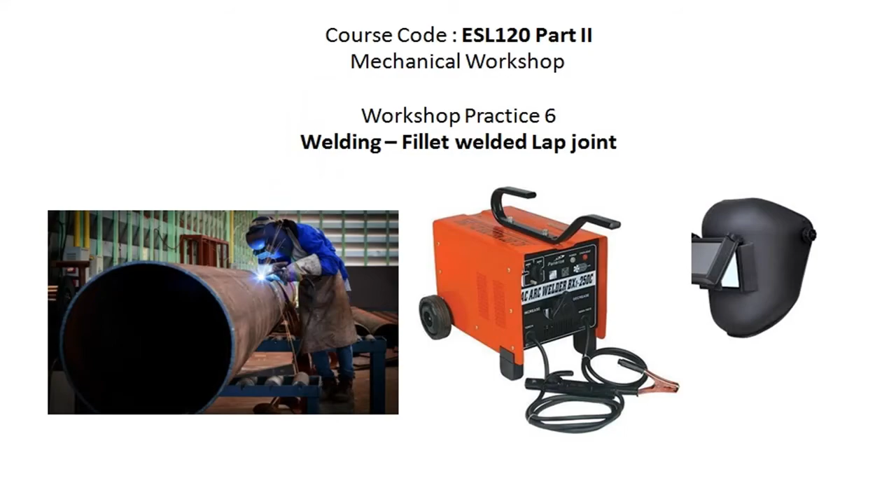Dear students, today we will discuss about welding. Welding is used to make a permanent joint on metal or non-metal, non-metal like plastic, glass, etc. In our mechanical workshop, we use only welding of metals.

There are so many types of welding. Mainly, there are basically two types: pressure type welding and non-pressure type welding. In pressure type welding, one example is forge welding. In forge welding, metal pieces are heated to a high temperature, just below the melting temperature, and kept together, then struck with a hammer. Then both will be stuck together. That is one type of pressure type welding.

Second one is resistance welding. For example, spot welding. Keep the items one over the other and give electric current, meaning heavy current. Then press the electrodes together. Then the item will be melted at that spot and stick together. That is the pressure type welding.

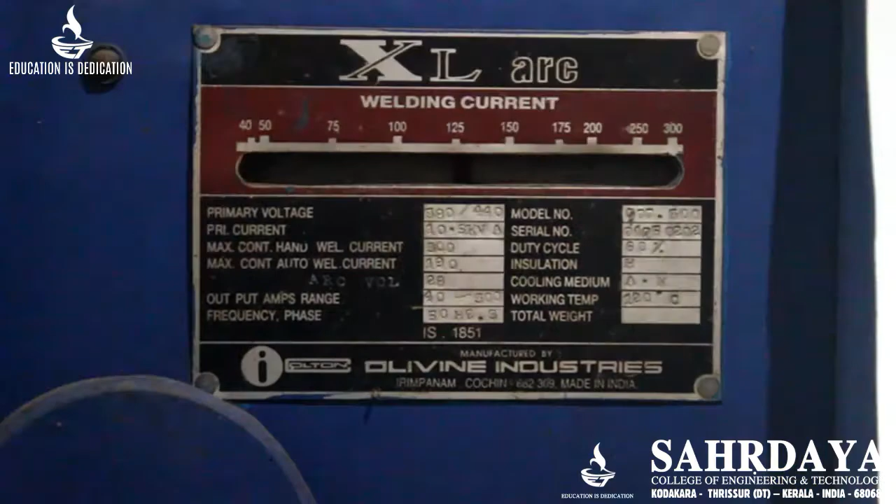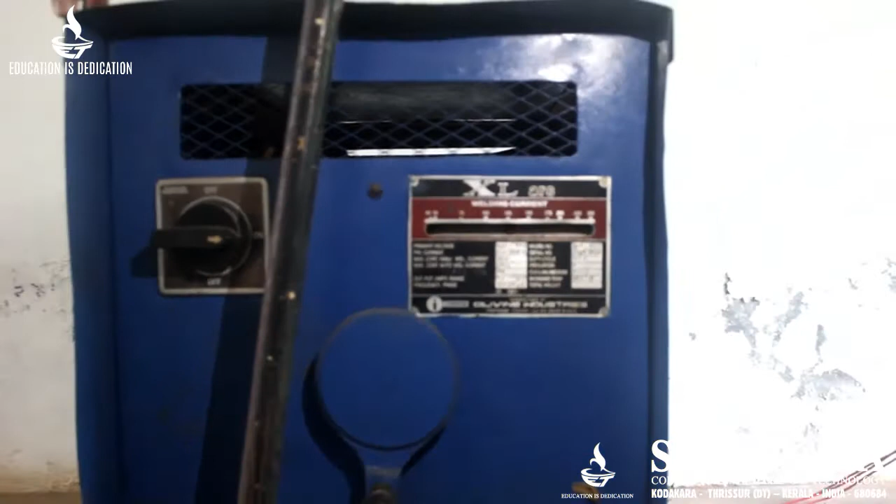See, you can see the label of a welding machine. This is a 3-phase welding machine. The input is 415 volt 3-phase, and output, the open circuit voltage, will usually be around 50-52 volts.

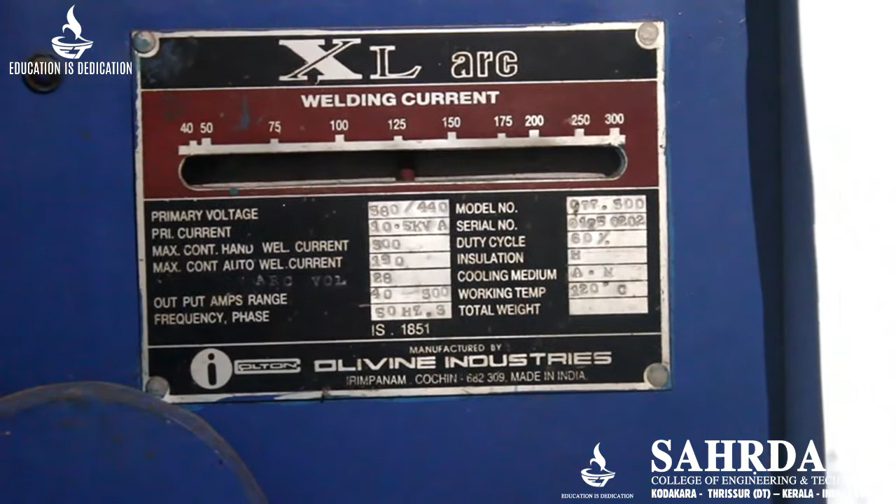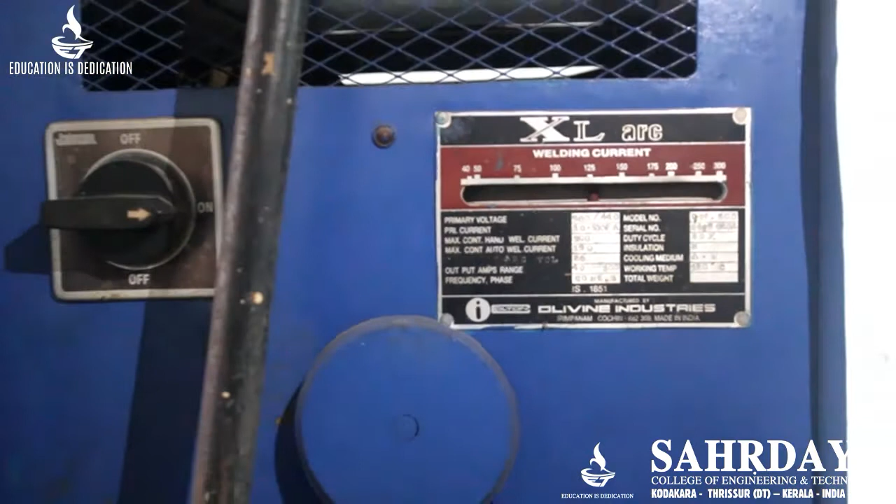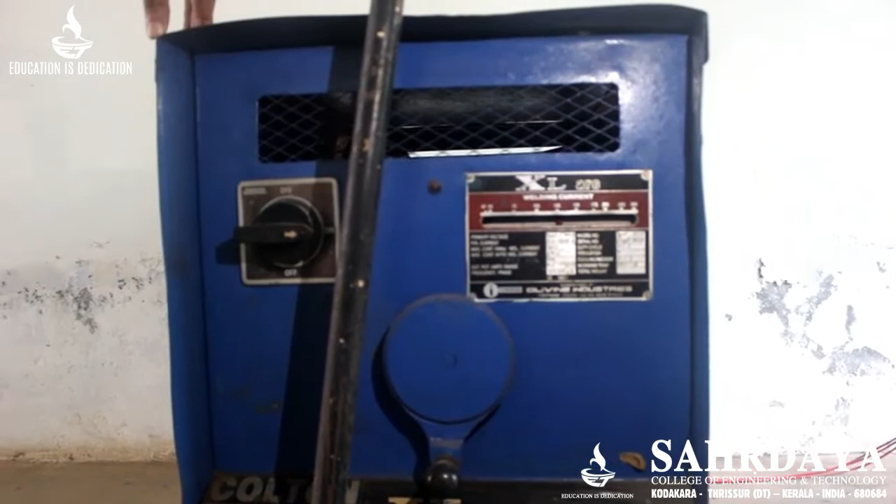Whenever you are starting the welding, the voltage will come down to about 20-22 volts. Actually, the 50 volt is kept because if you hold both the terminals with your hand, there should not be any shock. You can go up to around 90 volts without shock. But in rainy season it may be a little shocking if you are holding both terminals. In summer season, no problem at all. 50 volt, almost all persons can withstand that voltage.

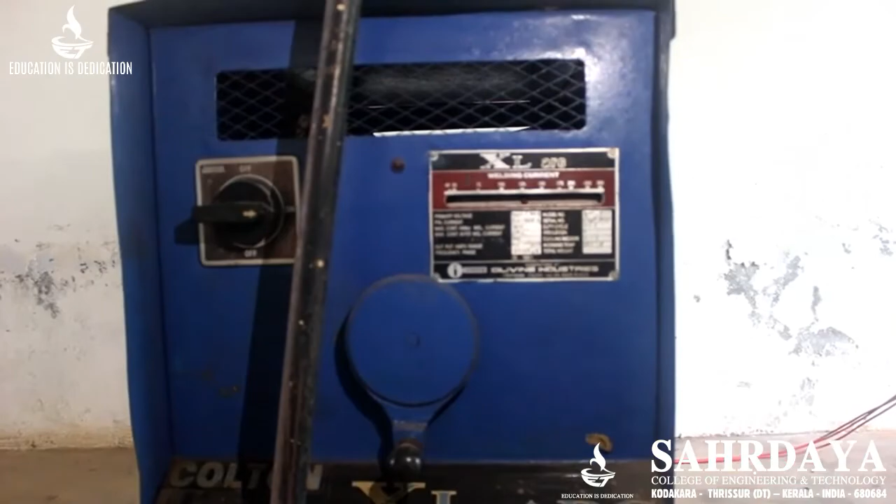In order to adjust the current, we have to rotate this one. Current adjustment is required depending upon the diameter of the welding electrode we are using. For smaller welding electrodes, less current is required, and for larger diameter electrodes, more current is required. You have to look into the chart to see how much ampere is required for a welding electrode.

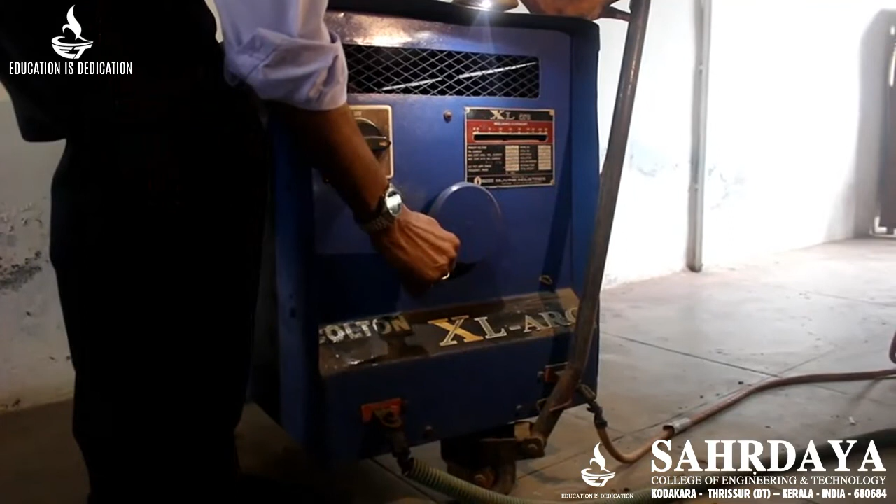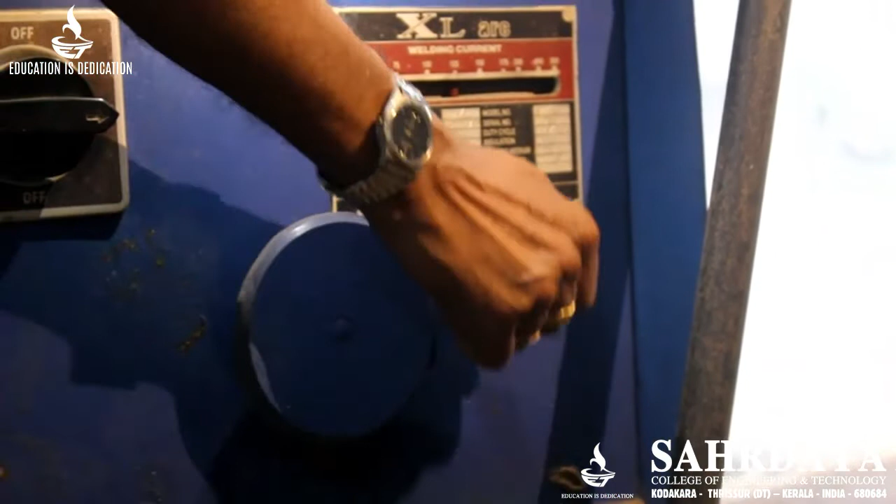Usually it will be written on the electrode cover itself. Whenever we rotate in the clockwise direction, the current will increase, and if you want to reduce the current, you rotate the handle in the anti-clockwise direction. We are here using a 3 mm electrode. For a 3 mm electrode, the required current is about 90 to 110 ampere. That all again depends upon the base material and thickness of the base material we are using.

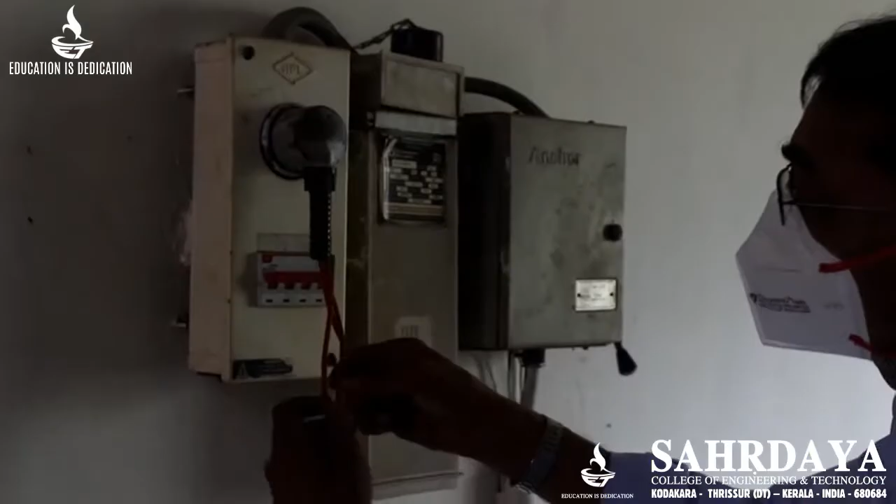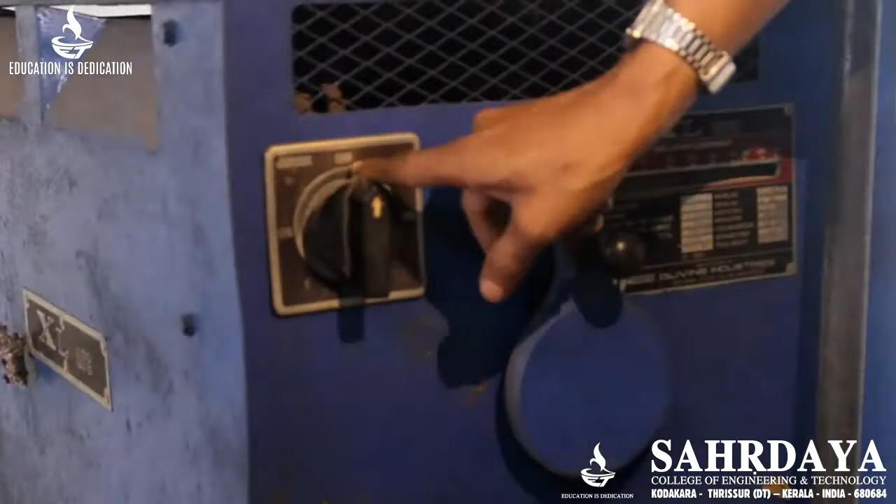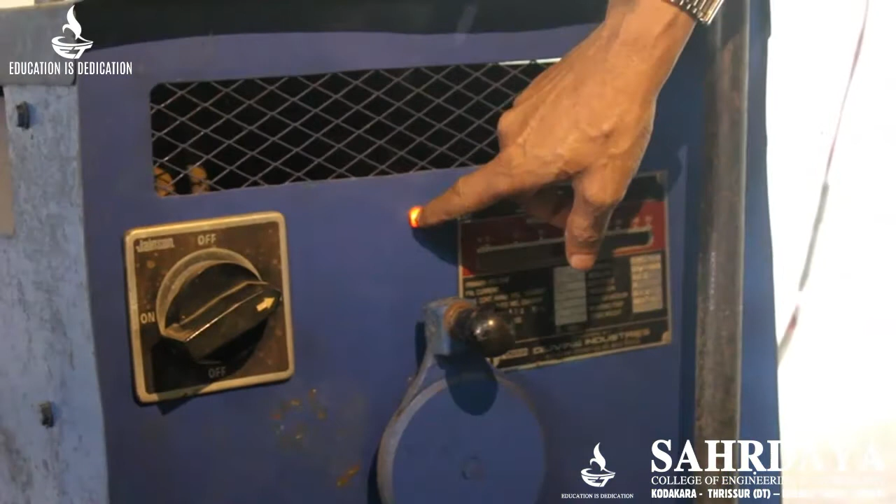The input is a 3-phase 3-wire system. You can see this one, and a main switch is provided here to switch on. After switching on, you can see the wire going inside the welding set. Here there is another switch for switching on or off, you can see off and here on. This also on, either rotate in the clockwise direction or anti-clockwise. Now you can see here the light is on, that means the welding set is now ready for welding.

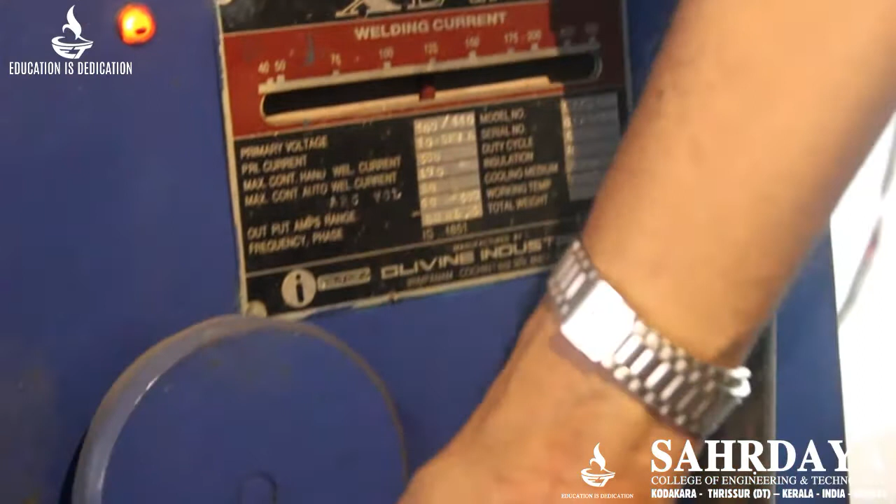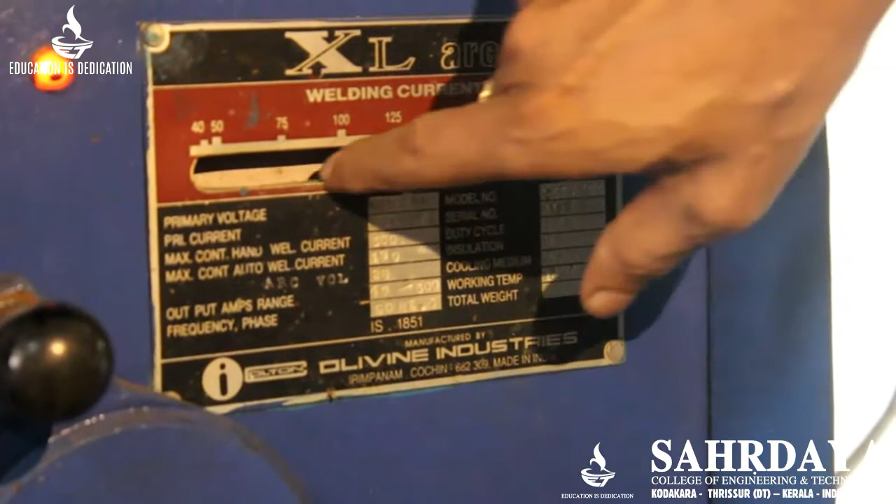Again, it depends upon the diameter of the welding rod we are using; we have to adjust the current. To increase the current, you have to rotate this handle. You can see a needle which is moving according to the rotation of this one. You can see here, now it is in between 125 and 150 ampere, about 130 I think.

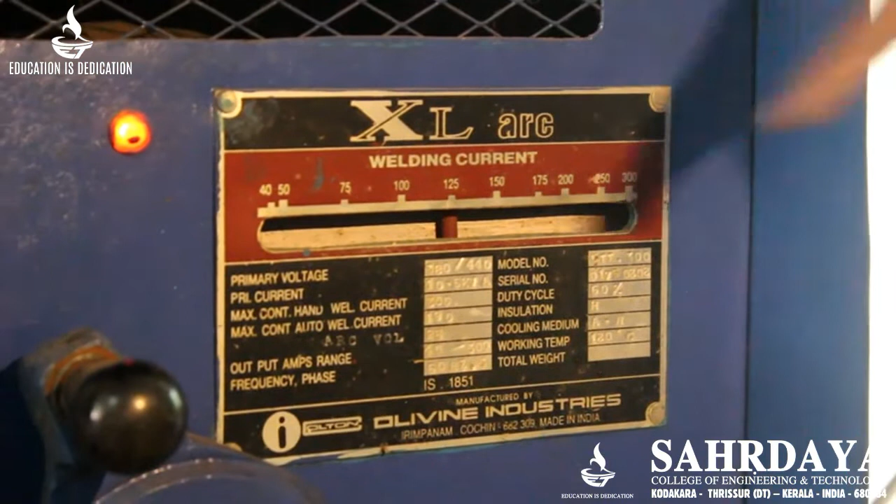130 ampere rating is used. In order to use 10 gauge or 3mm welding rod, we have to reduce the current to about 125 ampere. Again reduce up to 110 ampere, that is enough.

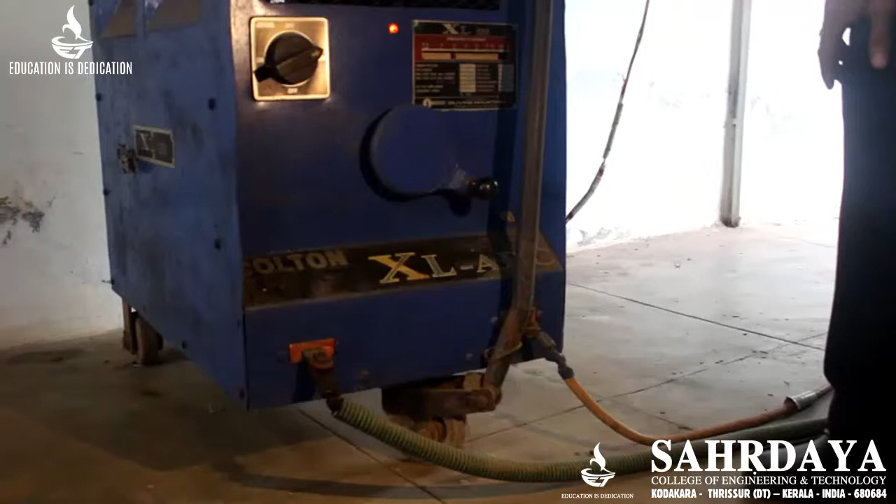Output is taken through two terminals. One is for the electrode and the other is the earth cable.

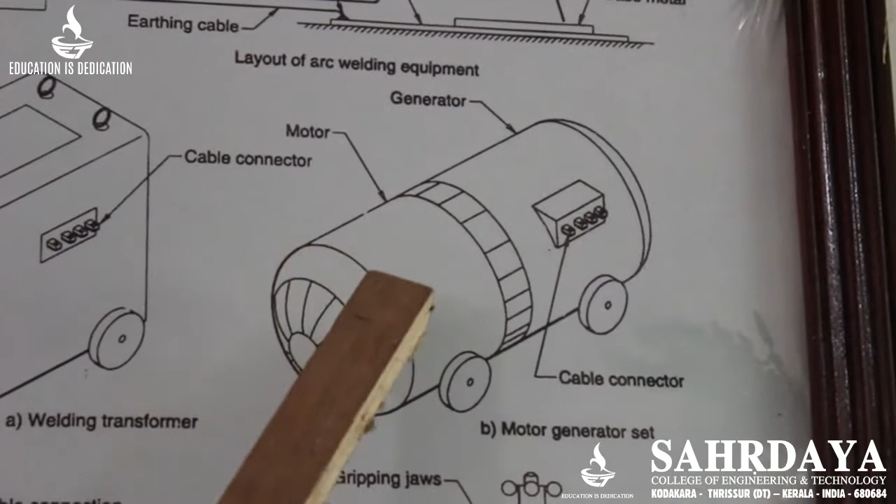When there is no electric power available, we have to use a motor generating set. Here you can see this motor generating set. One generator will be coupled to a diesel engine. The diesel engine will be working and coupled to the generator, and the generator current is taken for welding. That is this one.

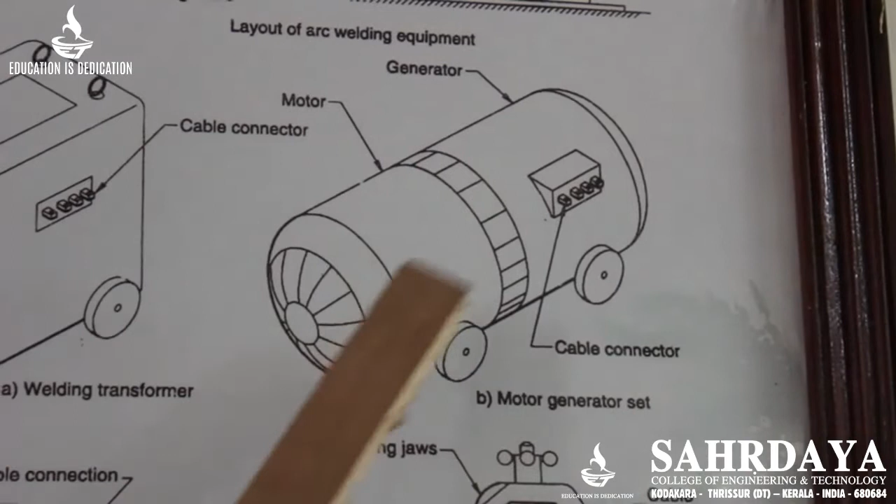Similar to this one, the DC welding set is also available. Its size will always be very small and the weight is also very small. For portable purpose, usually nowadays the DC welding set is used.

Now I will tell about various types of accessories used in the welding shop. This is the face shield. Face shield is used to protect your face and the skin of the face from the ultraviolet rays emitting from the welding region.

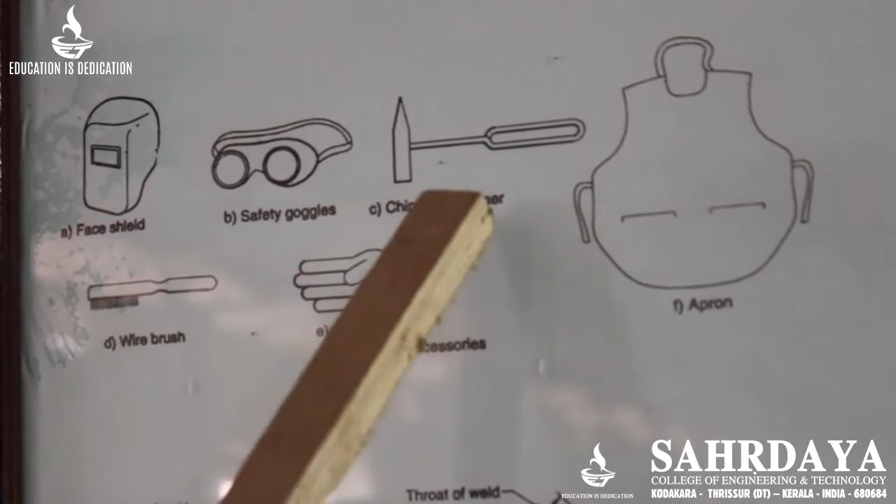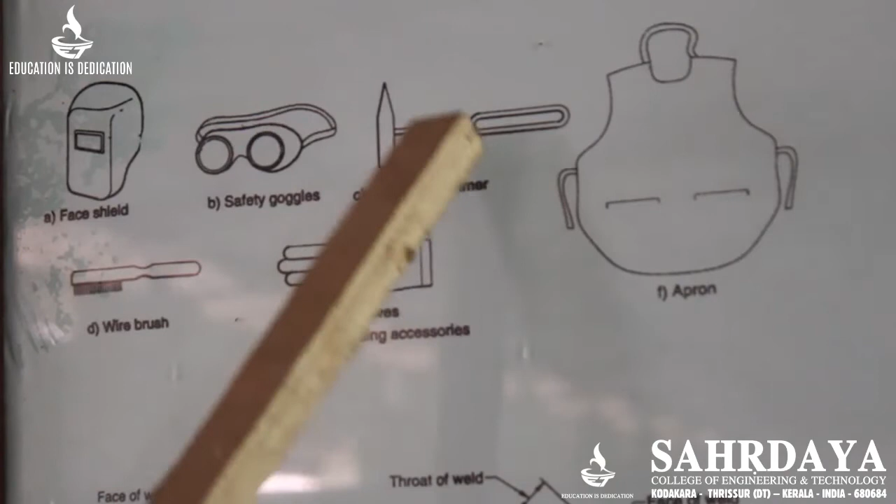Similarly, safety goggles are usually used. Whenever the flux has to be removed after welding, safety goggles are used along with a chipping hammer. We have to chip the item to remove the unwanted flux, etc. For that you have to use a chipping hammer. This I will show you physically here also.

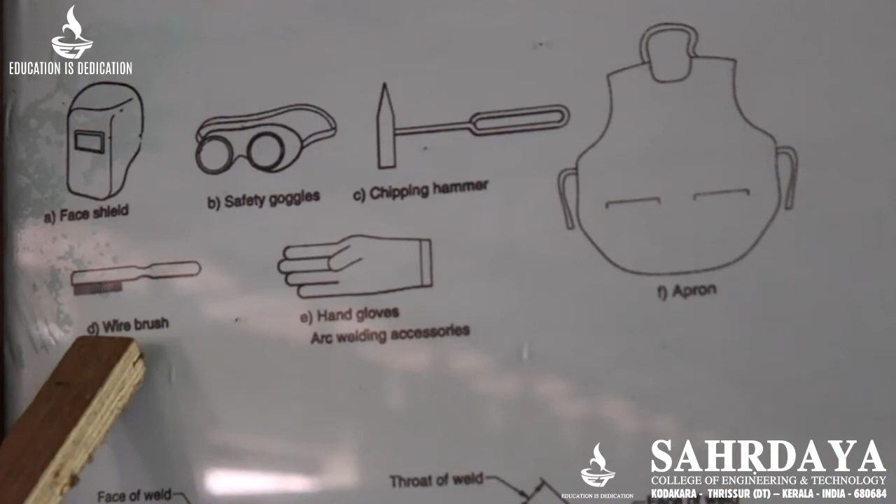Before welding an item, you have to remove unwanted oxide and other unwanted items like oil, etc. You have to use some cotton waste as well as a wire brush to remove the debris.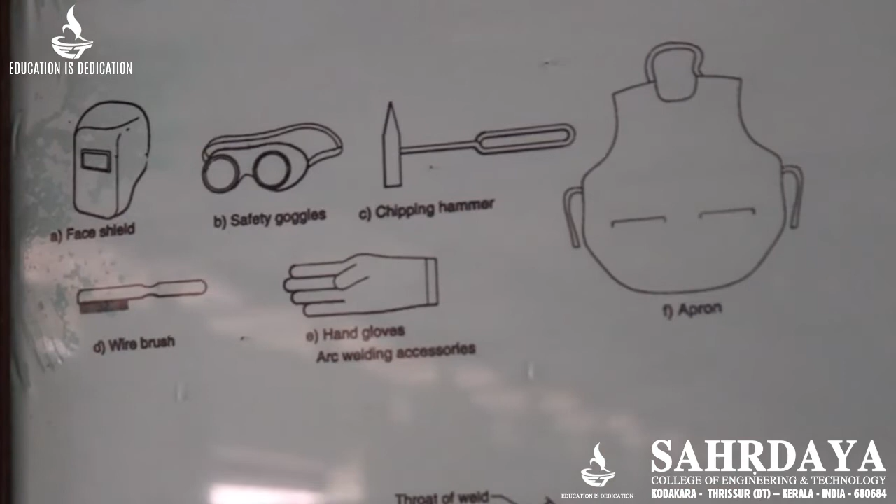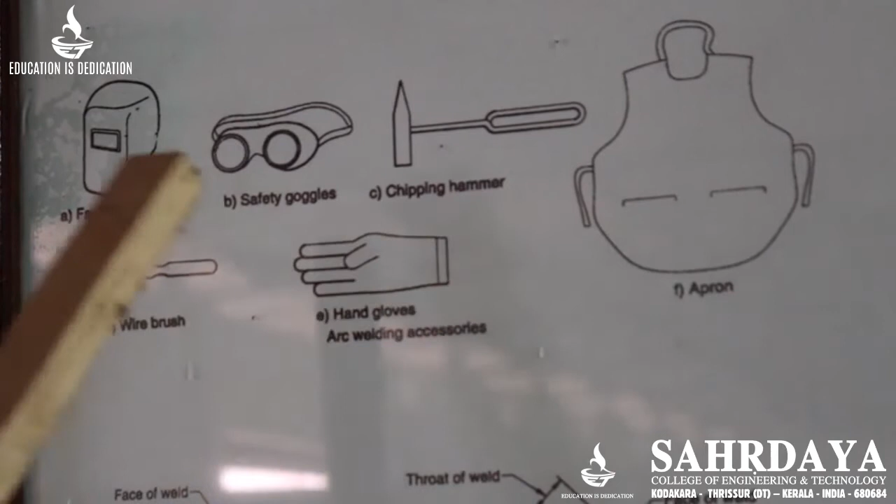And in order to protect your hand, you can use hand gloves. This will protect against the ultraviolet rays emitting from the welding region, which would otherwise affect our hand.

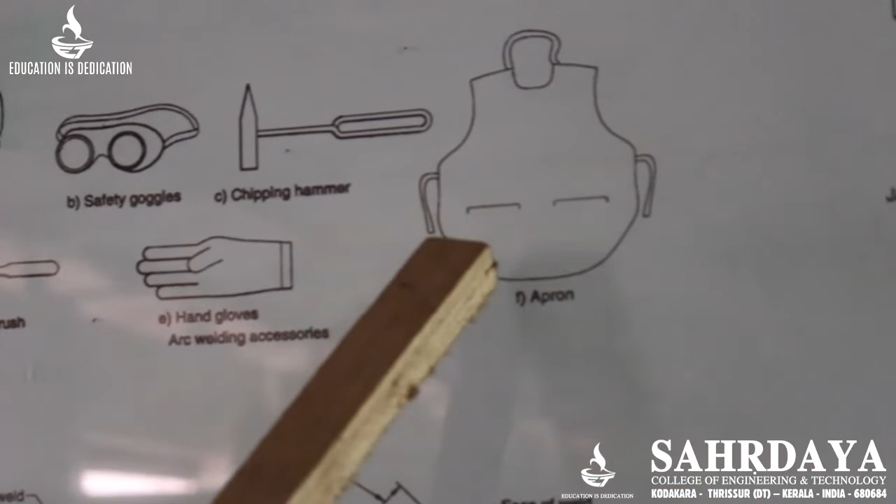While welding, it is better to use an apron so that we can protect our working dress. Usually this type is available. Another type is a welding dress itself which we can purchase. It is made up of a special type of cotton impregnated with some chemicals so that it will not catch fire immediately.

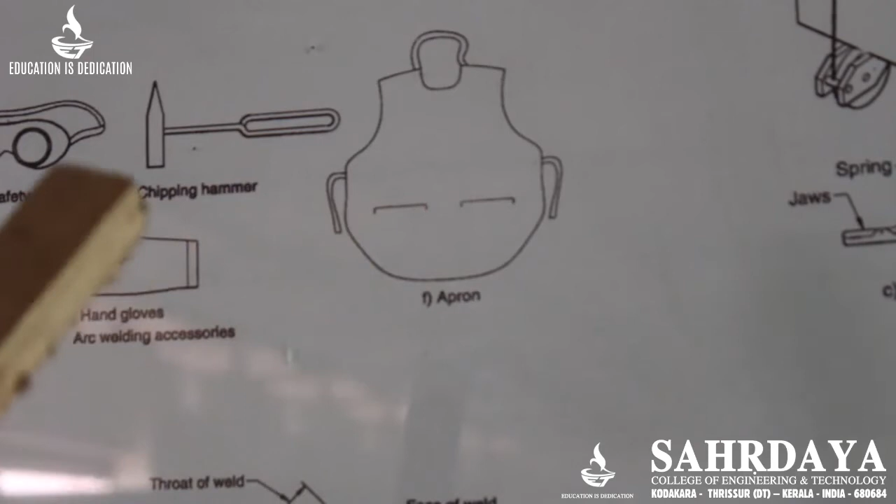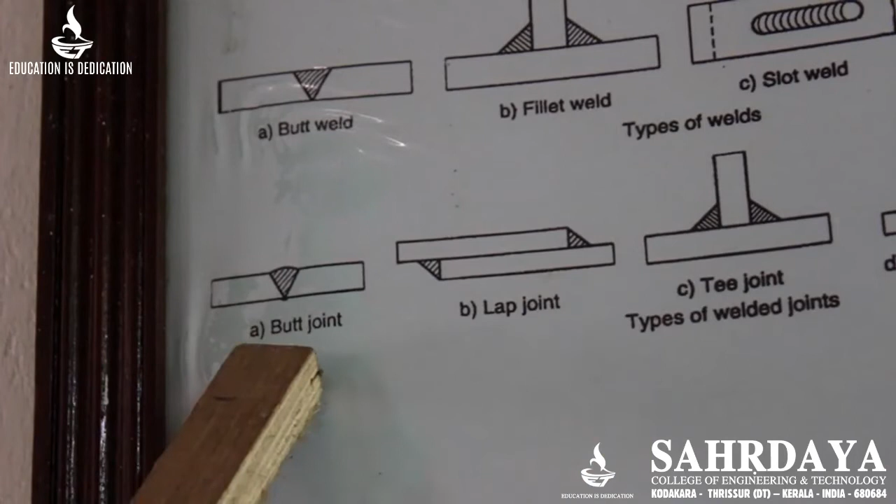Now I will explain various types of welded joints. This is called a butt joint. Before welding the butt joint, usually a V groove is provided, meaning the sides of the item will be chamfered. Then you will get a V shape, and that V shape is filled with welding metal. This is called the V butt joint. Without this V, a plain butt joint can also be done.

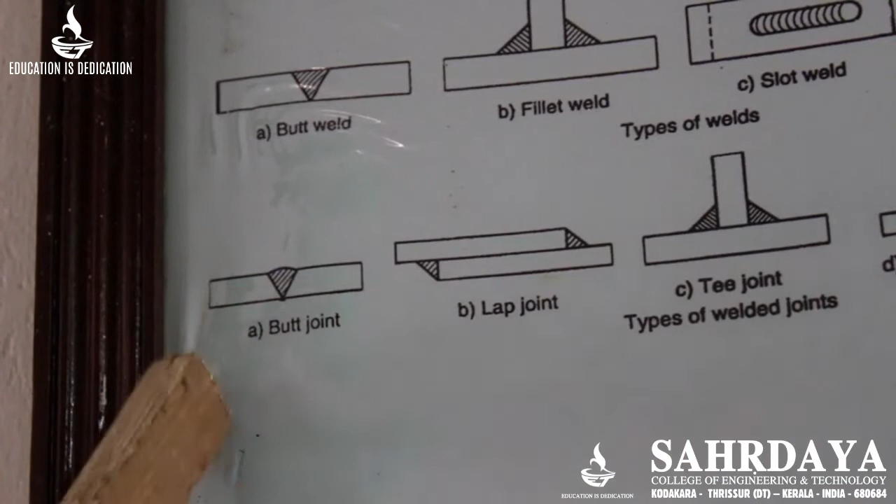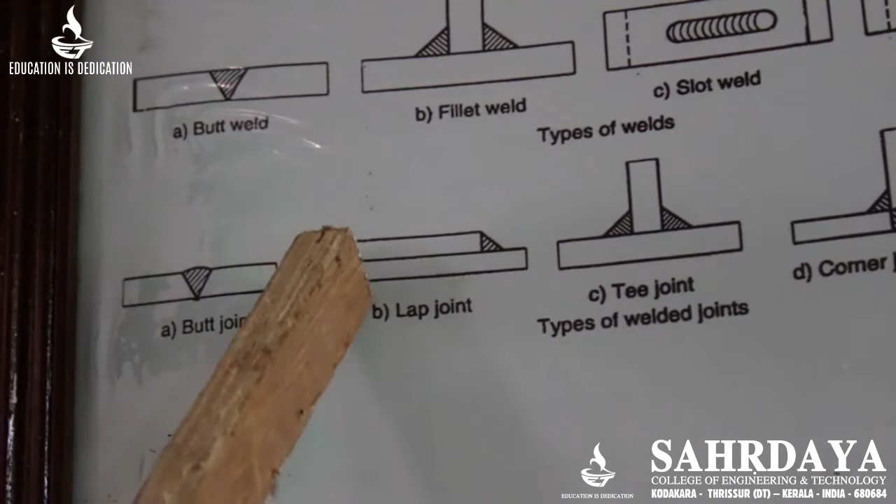This is the lap joint. Usually we will be giving training to do this one, the lap joint. You can see two pieces are lapped together and welding is done at the ends.

This is the Tee joint. It will have one item in the vertical direction and one in the horizontal direction, and these corners are welded.

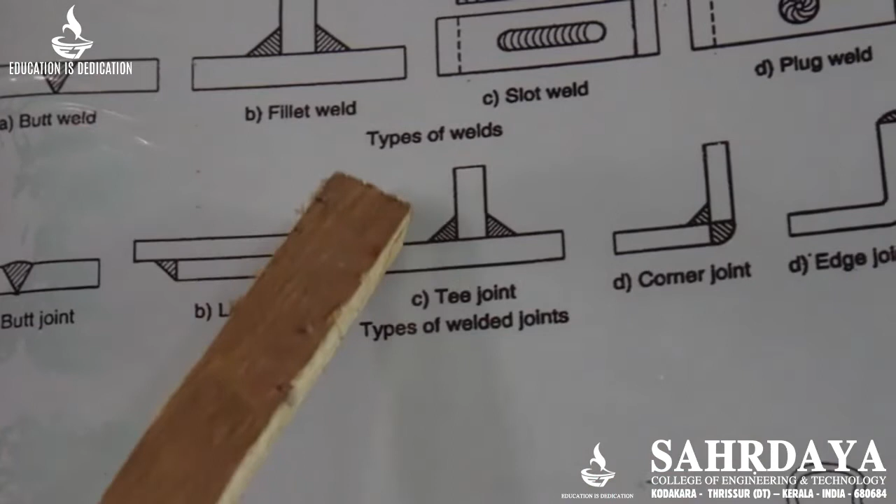This is the corner joint. Kept at 90 degrees, the inside as well as outside is welded.

See, this is shielded metal arc welding, ordinary stick welding, also called stick welding. Stick welding means the welding rod is used to weld the item. Flux coated welding rod is used. That I will show you later.

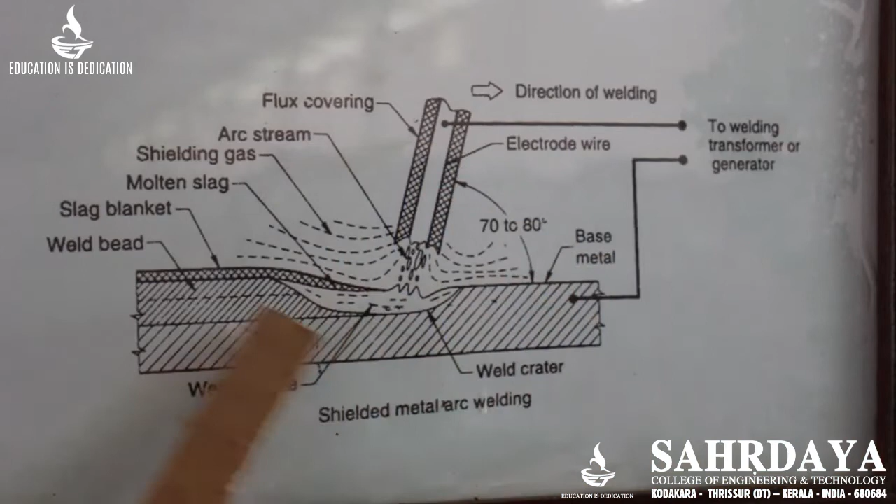See, this is the base metal, and on the base metal we are doing the welding work. Here you can see the welding puddle, also called the crater. The molten metal will be filled here.

While melting the welding rod, the outer flux will melt and become gaseous. A portion of the flux will be converted into gaseous form, and that gas will protect the welding metal, the molten metal, from atmospheric action. The atmosphere contains oxygen, and the oxygen will combine with the molten metal to form iron oxide. To avoid that, the flux is provided with a particular material that becomes a gas when heat is applied.

You can see the angle of the welding rod is fixed in between 70 to 80 degrees, not 90 degrees. Welding is done from left to right, as you can see. Here is the welded portion, and it is going in this direction. So this angle of 70 to 80 degrees gives the best result.

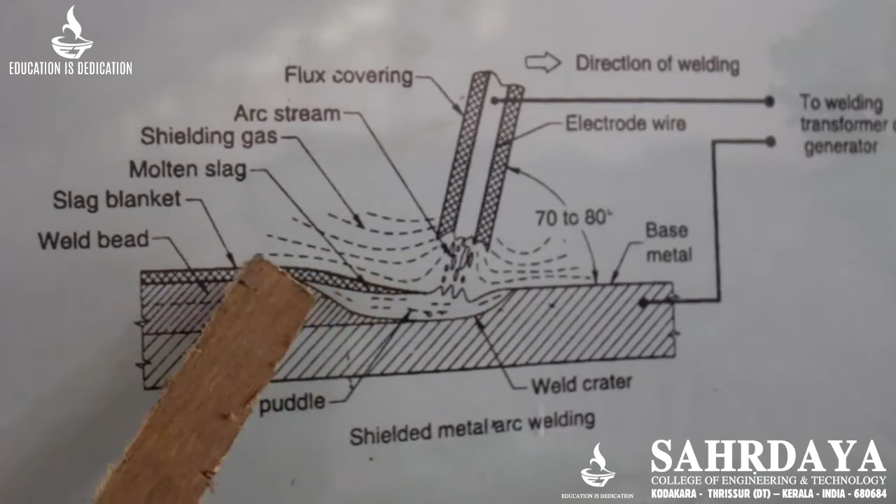See, flux will be converted into slag after welding. The slag is a solid item. This has to be chipped out using the chipping hammer. You can see this chipping hammer. This is a non-metal, but it will conduct, so no problem. It will conduct here and welding will take place.

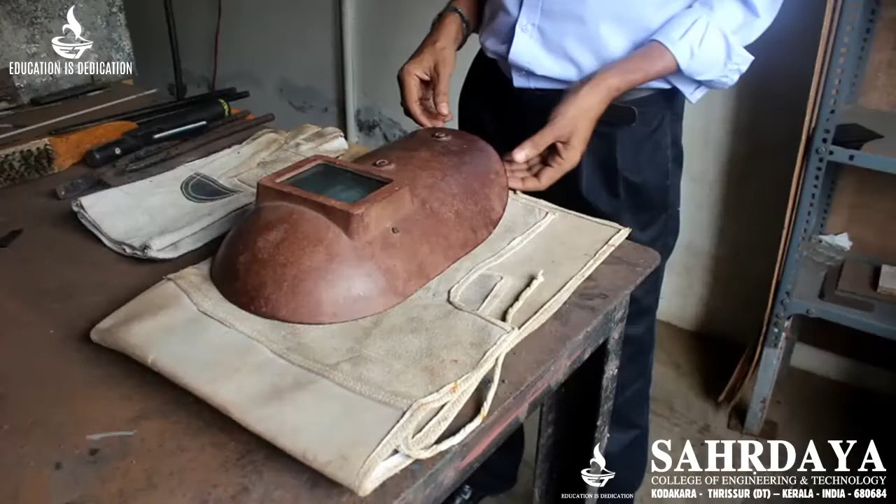First I will tell about the safety items to be used in a welding shop. This one is called a face shield. The face shield is provided with a glass which will filter all the ultraviolet rays. If you do not filter that, it will affect the retina of the eye, causing damage.

The next item, you have to use hand gloves. Hand gloves are provided to protect your hand from heat as well as the ultraviolet rays which may affect your skin.

While welding, you have to use hand gloves. Hand gloves will protect the hand from heat as well as from ultraviolet rays, which may affect your skin. So you always use welding gloves. Usually 2 numbers are used, one for the left hand and one for the right hand. This will also protect from sparks which may touch your hands.

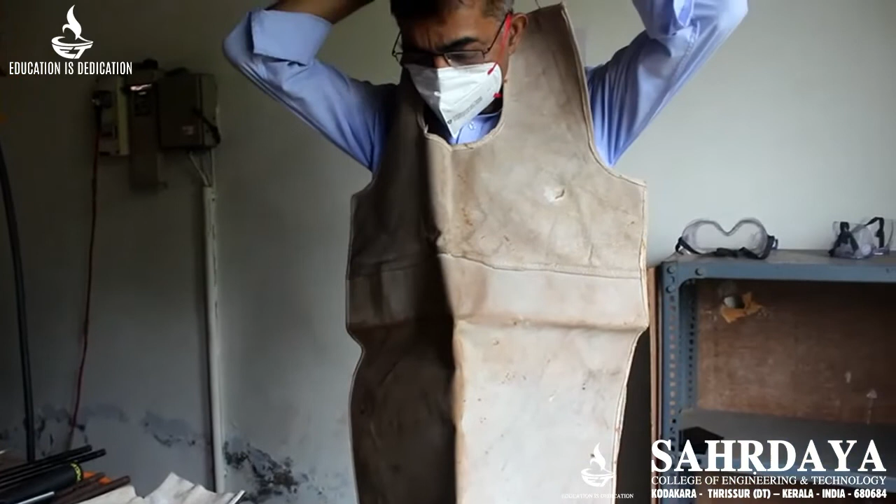Now another item, as I told earlier, you have to use an apron. This can be used to protect your dress from catching fire. So if you are using this one, no fire hazard will occur. It is better to use this while welding.

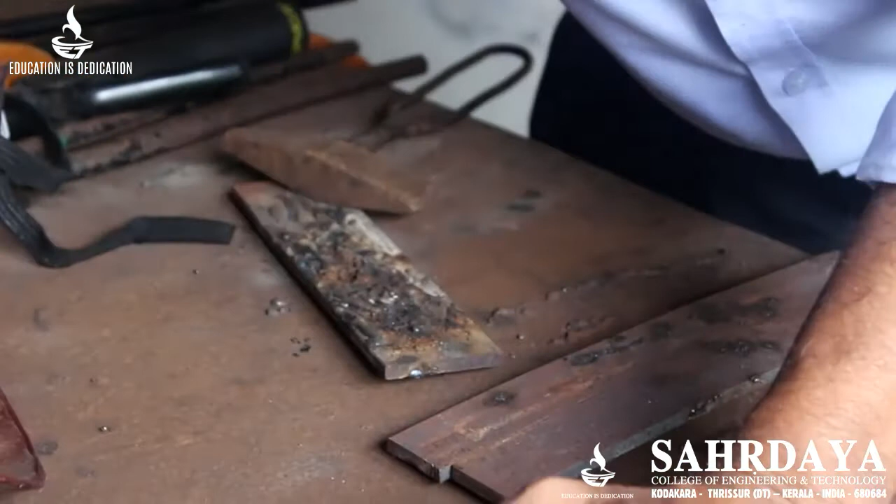One more item I will tell you, this is called a goggle. This goggle is used to protect your eyes while chipping the flux. After welding, you have to remove the flux. To show you how, you strike at an angle. While striking, some pieces will come out and may come to your eyes. To protect against that, this item is used, called a goggle. You can use this one

and remove the chip. This is only a plain glass, nothing else. This, as I already told, is called a chipping hammer, used to remove the flux from the welded part.

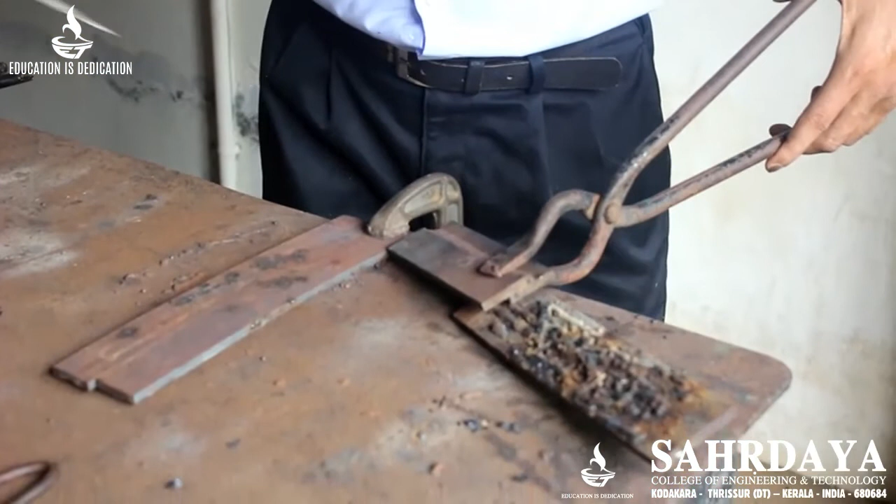Next one is tongs. Tongs are used to hold the workpiece together. Suppose you want to weld it here, you can hold it like this and give the welding here. First, a spotting is done, called tacking. First you tack here as well as here, then you can remove the tongs. Various types of tongs are available according to the type of workpiece.

This one is called a wire brush. Wire brush is used to remove unwanted things or clean the surface. You have to do it like this, then only you will get very good welding. That means there should not be any unwanted thing like oil or some other oxide coating. You can remove it; for removing oil etc., you can use cotton waste or something like that.

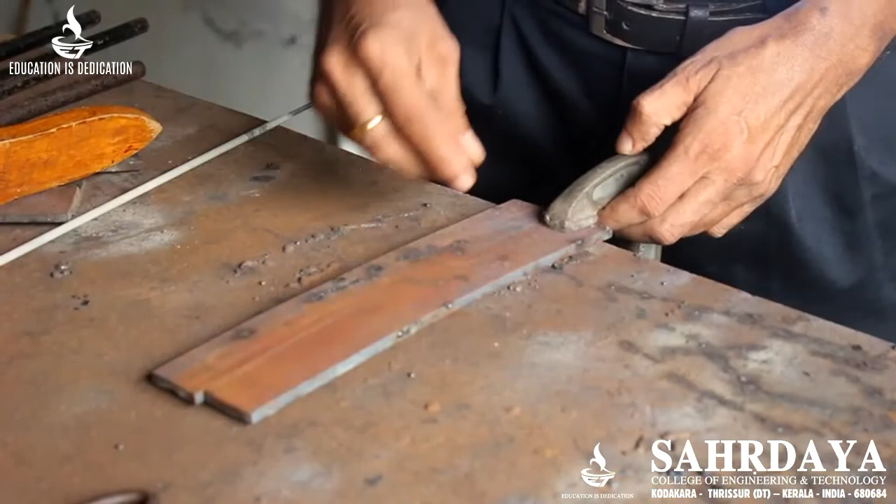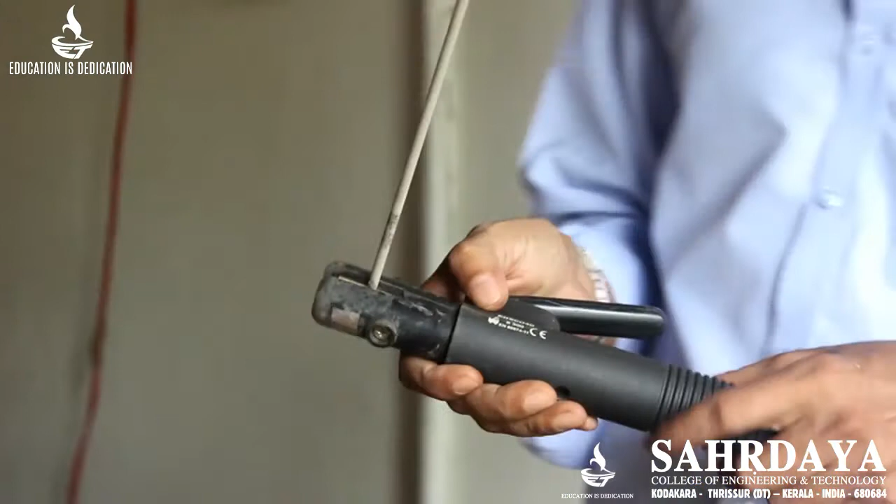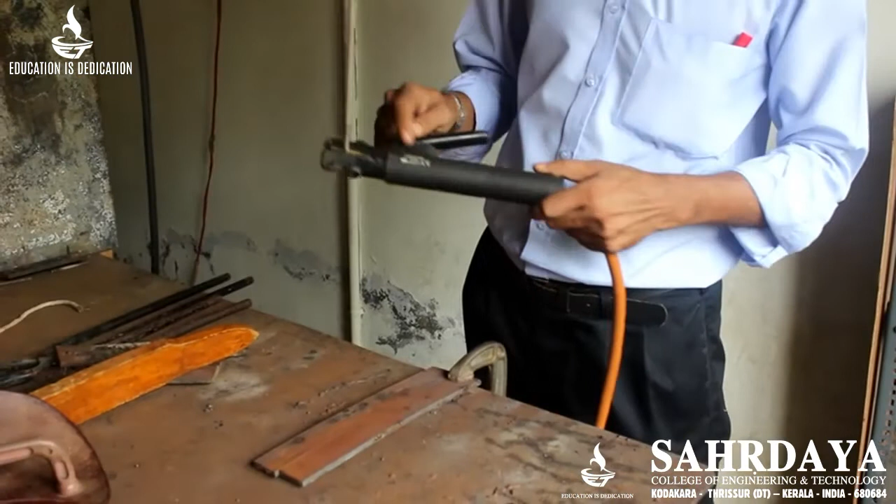Next one is called electrode holder, used to hold the electrode. Electrode holders you can see here, B300 - the 300 indicates the maximum current rating of the electrode holder, meaning 300 ampere is the capacity of this welding rod holder. Sometimes we may have to use a 600 ampere rating for a 6mm diameter welding electrode. Up to 6mm welding electrode is available.

Think about shipbuilding - you cannot use a small electrode like this, you have to use a very thick electrode.

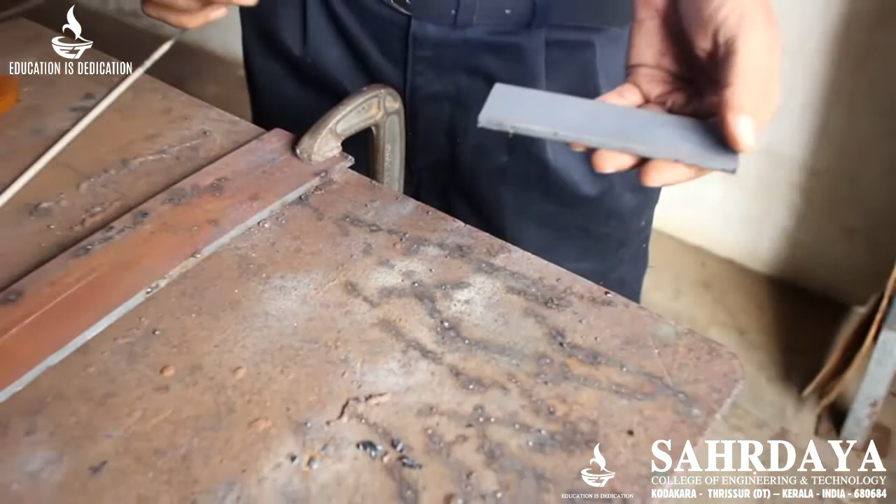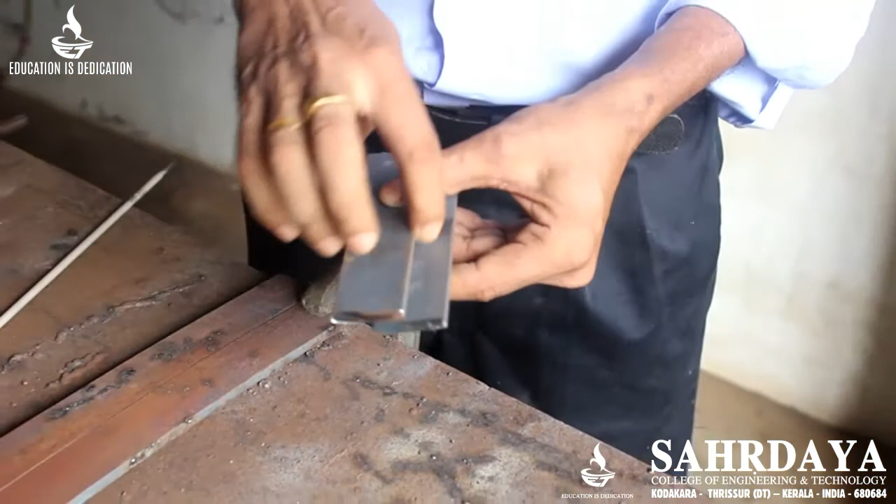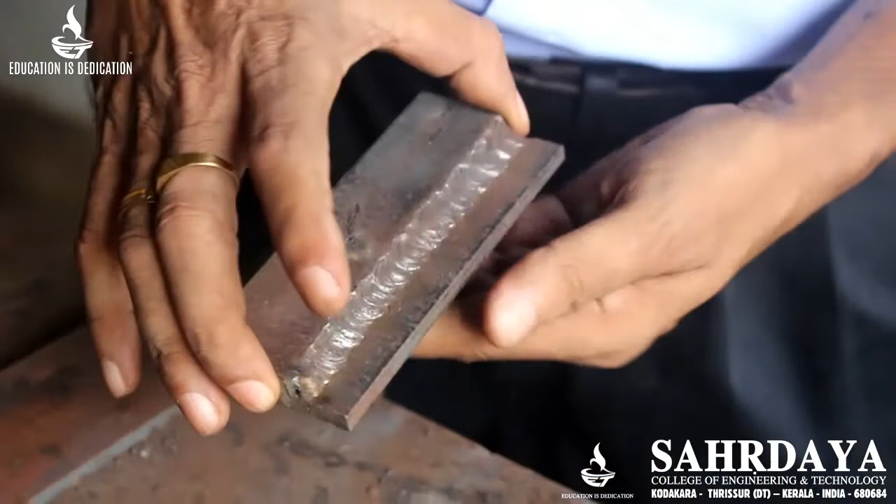We will be doing a lap welding. Lapping means keeping one item over the other, like this. Now you can weld here as well as here for this wide item. If the width is very wide and has too much length, you can keep it like this and weld here as well as here, so you get a lap welded joint. You can see the item we have already done here - this is the lap welded item in the lengthy direction. You can do it this way also in the shorter length, so you can extend the length of the item.

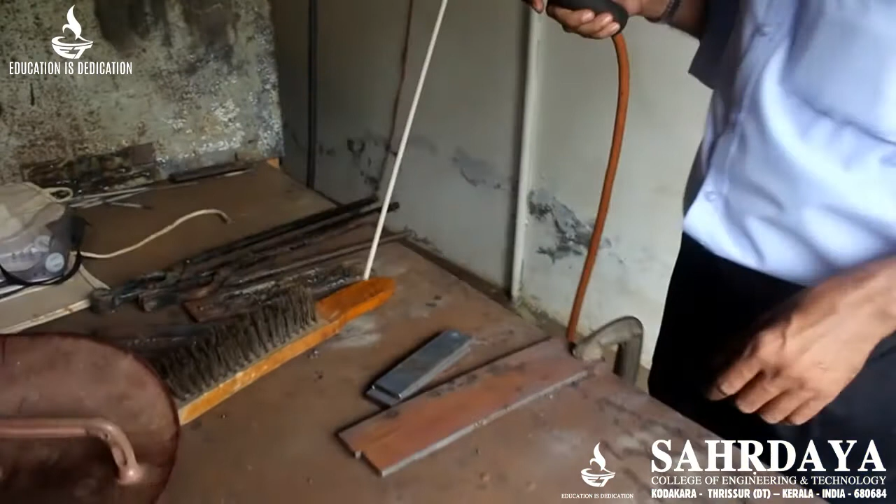I will show you the position of the welding electrode to be kept while welding. This is a plain butt welding being done. For that I have fixed the metal. You have to keep the welding electrode at an angle of about 70 to 80 degrees here - 70 to 80 degrees, not 90 degrees.

70 to 80 degrees, then start from here. Touch the item here and lift a little. A little means usually the diameter of the welding electrode, the core diameter - this is the core diameter, that much length difference in height is required. That means touch and lift a little, so that about the diameter of the core is here, and arc will usually be coming.

This is AC welding. The arc will be going there as well as coming from here to there, 50 times it will be transferred, because we are using 50 hertz current here. You have to usually move in a zigzag direction to get better welding. Zigzag means this direction, like this, in a small size. After reaching the final position, again you have to retract a little, then only you will get the best result.